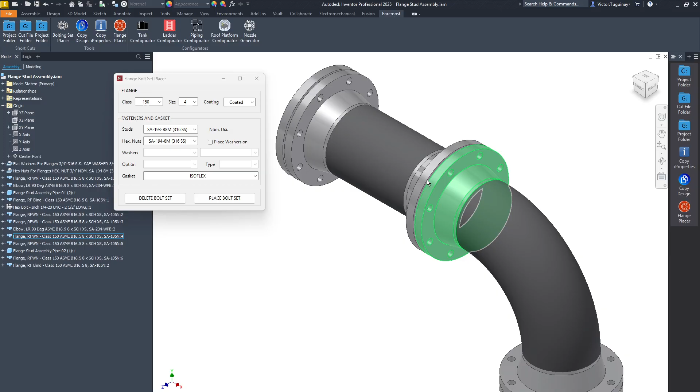Okay, I'm going to demonstrate the use of this flange bolt set placer add-in. This is an add-in that I developed that would place stud bolts in flange to flange connections. So you don't have to place them manually, and you don't have to use the built-in bolted connection feature of Inventor, because sometimes this bolted connection feature is not so friendly when you are using

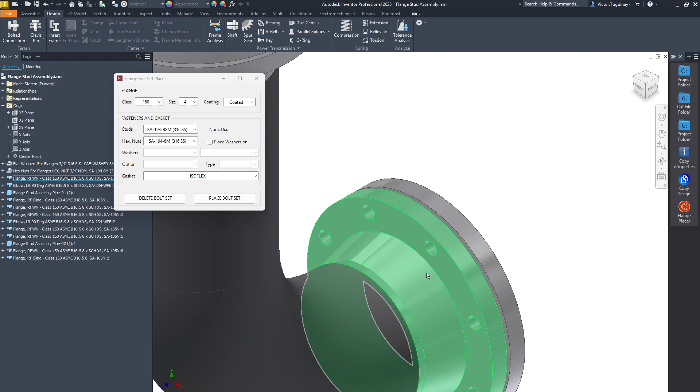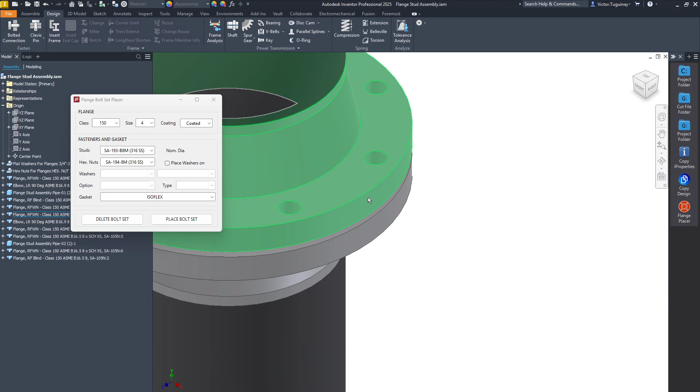stud bolts. I think it works well if you are using hex-headed bolts, but for flange-to-flange connections, usually we are using stud bolts, and it's kind of tricky how to position the stud bolts because they don't have a head which we can use to position them. So it's just a plain straight bar, a threaded bar that's going to be placed onto this one.

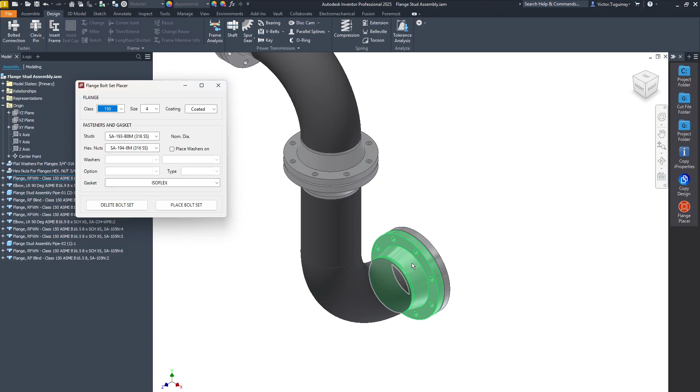So I created this add-in so that it would reduce the time in the placement and creation of a bolted connection. It will also place gaskets between those flanges, like here. Washers will be placed as well, optionally. You can place them on both sides of the flange or on just one side of the flange.

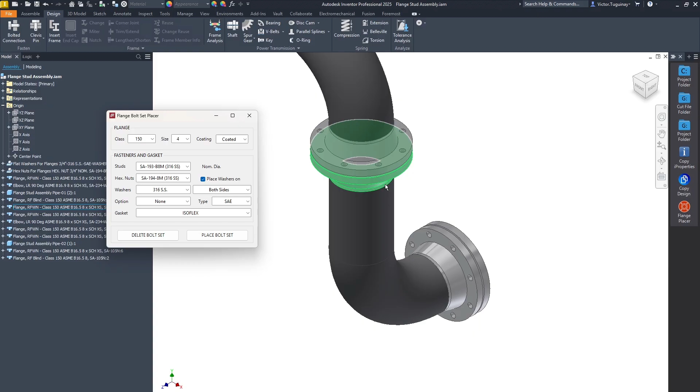So, in the company where I work, if the flange is coated, we usually place washers. So I'm gonna say put the washers on, and you don't have to change this one because I made it so that it will automatically detect and pull that information from the flange where you are going to place the bolting connection. So you can just change your materials here. Our company has these three materials for studs and these seven for washers.

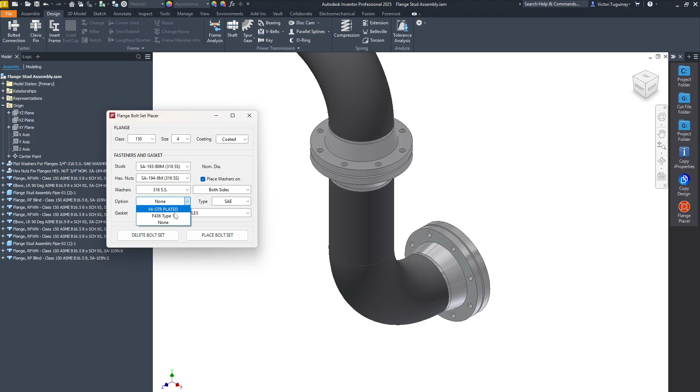And we either have carbon steel or stainless steel washers. And I'm going to choose both sides, place washers on both sides. I have some options for some material. If it's high strength plated F436 type 1, I'm just going to choose none. And I have the material here for the gasket. It's actually not the material, but the brand.

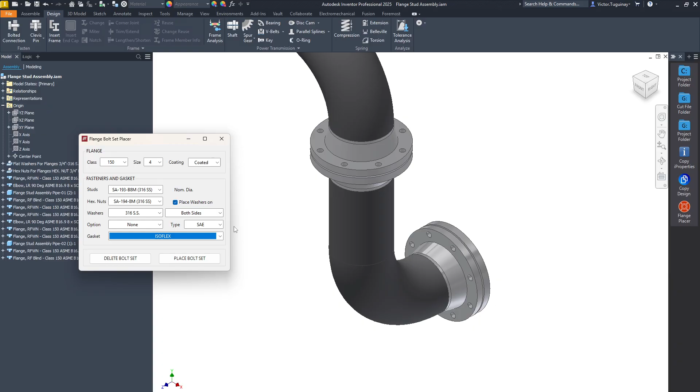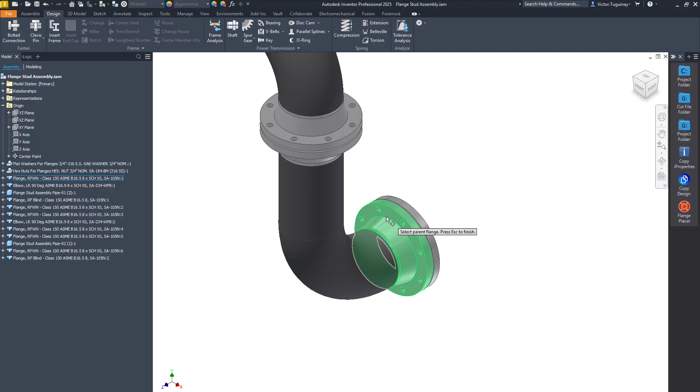So I have the Isoflex brand, you have the Flexitalic brand, CG and CGI. You have SF2401, and you have Linebacker. Our standard is just set to Isoflex, so that is all good. You can just set it like that and just place a bolt. Now it will prompt you to select the parent flange. The parent flange would be the one that the bolting will be constrained to. Either of the two will work, but you can choose which one you're going to constrain the bolt to. So for example, I'll select this one.

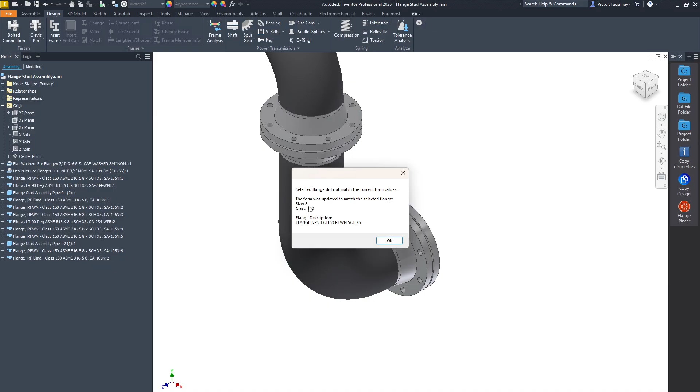And as you can see here, it detected that there was a mismatch. The size that is specified in the form did not match the actual size in the model. So it will give you this warning, and it will update the one in the form so that it will match, and proceed to place your gasket and washers. So these are placed there, and they're constrained. And so you have here the gasket, and then you have your bolting set.

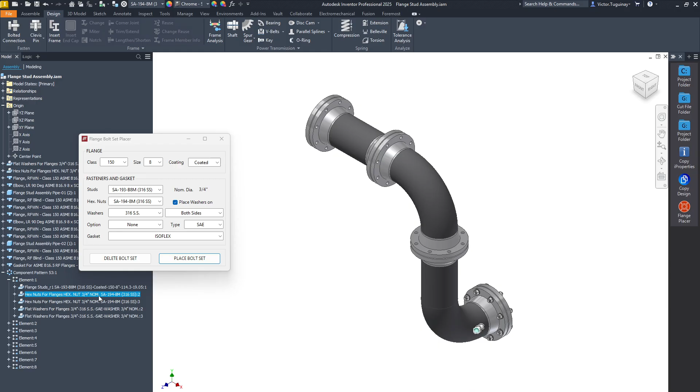As you can see here, it displayed the size of the stud that was placed in there. You can see here in the model browser, it has all these components that were pulled from the content center. So it took those components from the content center and generated them all from the family, the material, stuff like that. Or I can just keep placing, so you can see that it will create that. And as you can see, the command remains active so that you can keep pressing, and you will have your bolts placed there.

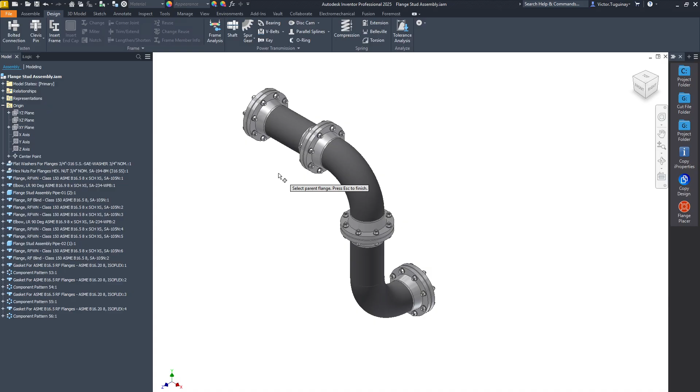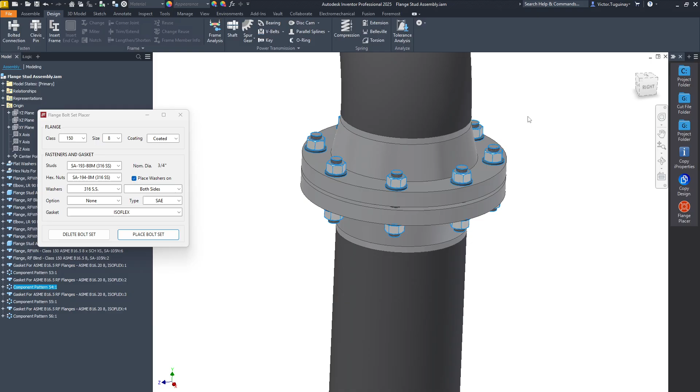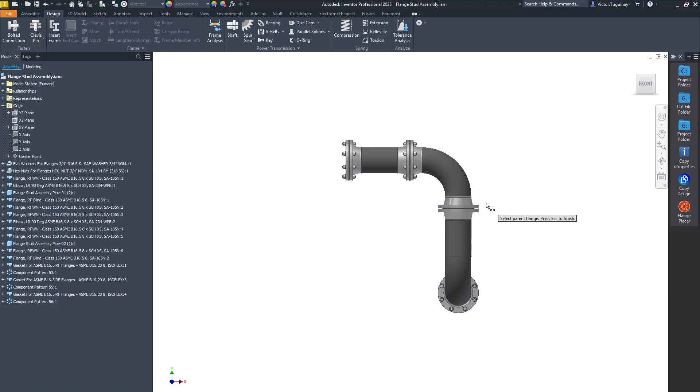Now, let's say you made a mistake. Let's say these shouldn't have washers. You can just delete that circular pattern, but then you will be left with the seed components there that you would have to delete manually, and you have to go in there and then maybe try to delete that gasket. But let's just say I'll put it back, and then let's see again.

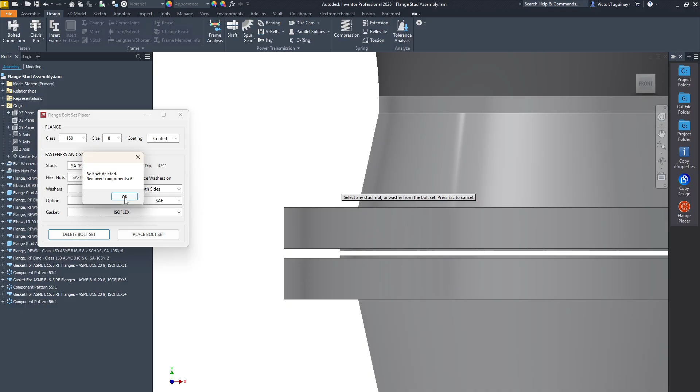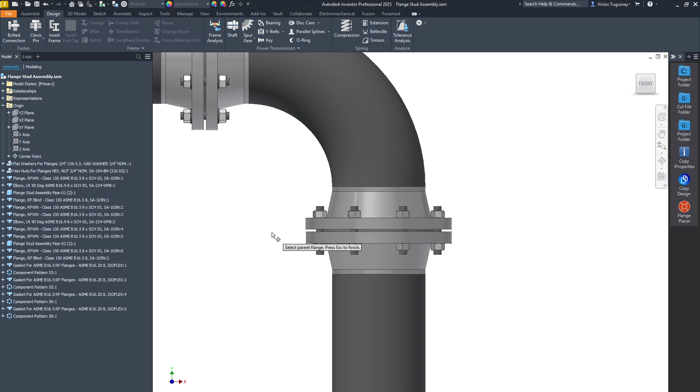Okay. So let's say you made a mistake like that and you wanted to remove the washers. I have a button here that will delete that right away. It will delete the seed component, and it will also delete the gasket. So you don't have to go in there and delete it manually. And then you can just uncheck the washers so that I'm not gonna place the washers, and then just place it there and rebuild the connection. You'll have it there. So that's it. That's how it works.